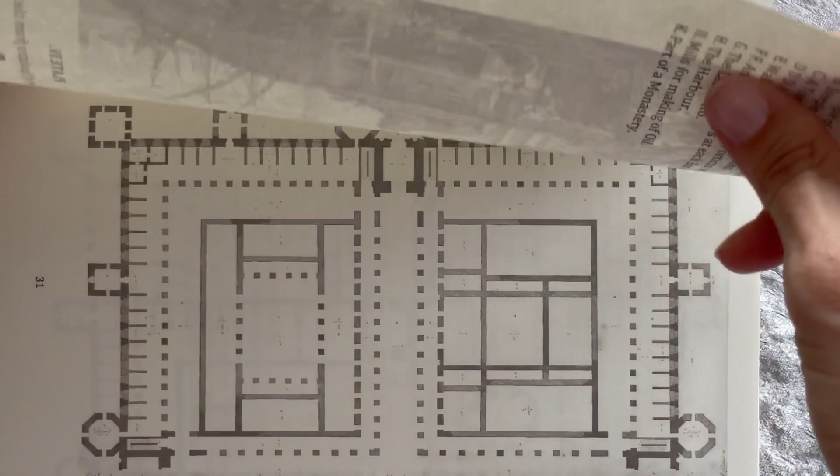This led me to form the scheme of visiting the ruins of Emperor Diocletian's palace at Spalatro in Dalmatia, that favorite building in which, after resigning the empire, he chose to reside. I knew from the accounts of former travelers that the remains of this palace, though tolerably entire, had never been observed with any accuracy or drawn with any taste.

The palace of Diocletian at Spalatro possessed all those advantages of situation to which the ancients were most attentive, and which they reckoned essential to every agreeable villa. The soil of that part of Illyricum was dry and fertile, though now considerable tracts of land lie uncultivated. The air is pure and wholesome, and though extremely hot during the summer months, this country seldom feels sultry.

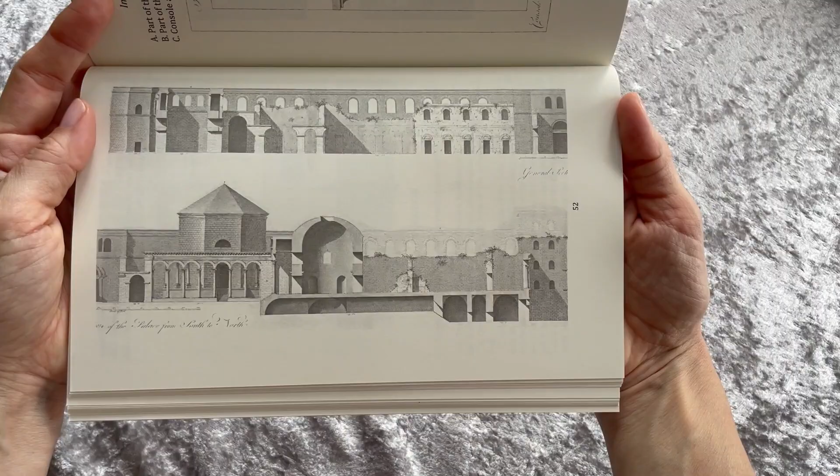The views from the palace are no less beautiful than the soil and the climate were inviting. Towards the west lies the fertile shore that stretches along the Adriatic, in which a number of small islands are scattered in such a manner as to give this part of the sea the appearance of a great lake.

On the northwest lies the bay which led towards the ancient city of Salona, and the country beyond it, appearing in sight, forms a proper contrast to that more extensive prospect of water which the Adriatic presents both to the south and to the east. Towards the north, the view is terminated by high and irregular mountains, situated at a proper distance, and in many places covered with villages, woods, and vineyards.

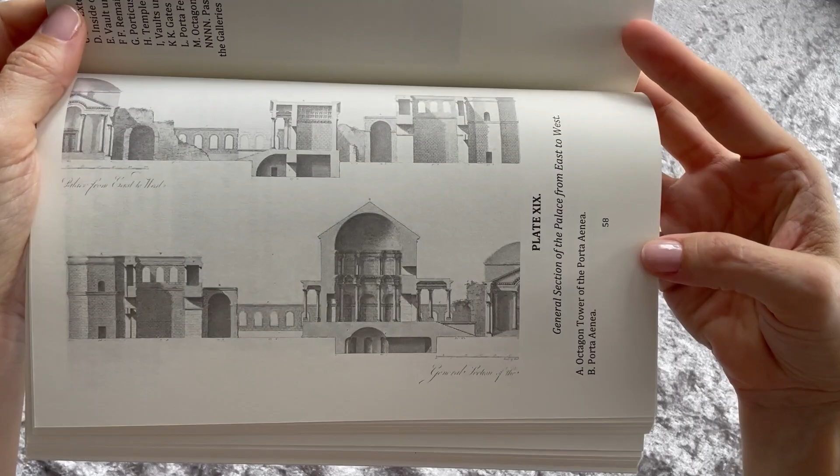From this description, as well as from the views which I have published, it is evident that no province in this wide extended empire could have afforded Diocletian a more elegant place of retirement, and the beauty of the situation, no less than the circumstance of its being in his native country, seems to have determined him to fix his residence there.

The present state of this great structure may be more perfectly conceived by considering the plan of it than by any description whatsoever. The curiosity of the reader, however, will not be satisfied with viewing this building in its present ruinous condition, but must naturally desire to form some idea of what was its plan and disposition in its more perfect state.

By good fortune, its remains are in many places so entire as to be able to fix with the utmost certainty the form and dimensions of the principal apartments. The knowledge of these leads to the discovery of the corresponding parts, and the description given us by Pliny and Vitruvius of the Roman villas enable us to assign to each apartment its proper name and to discover its use.

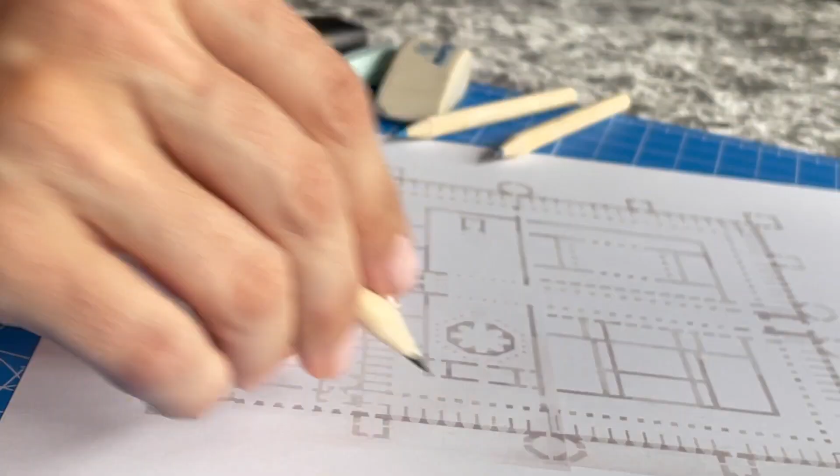Adjoining this is the Corinthian Hall, which the architect has designed observing a rule of Vitruvius by making the length of the room twice its breadth. Corresponding to the Corinthian Hall and opposite to it is the Egyptian Hall, which in every particular resembles the former.

These halls, together with the tetrastylis, or rooms of four columns, Vitruvius calls by the common name of the oeci. They were apartments for eating, and were generally of such a size as to hold two triclinia, or tables, with three beds each.

Next to these we find different apartments destined for bathing, a practice which the ancients considered essential to health, and with regard to all the apparatus necessary for that purpose, they displayed not only great elegance, but the utmost luxury.

Here we first enter the apodyterium, which was a room for undressing, and sometimes contained a tepida piscina, or lukewarm bath, so large as to allow of swimming about in it.

Next to this is the cella frigidaria, in which there was a baptisterium, or cold bath. Adjoining to this is the unctuarium, or repository for unguents, with which the ancients anointed themselves before their exercises.

From this we go to the cella tepidaria, or cella media, so named from its middle degree of heat, and because it was a necessary preparation for the laconicum, or cella caldaria, which was a bagnio for sweating in.

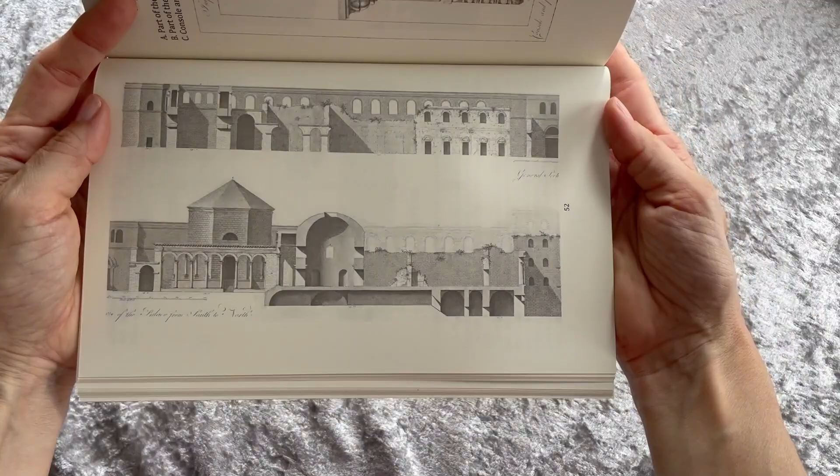Adjoining to it and towards the cryptoporticus was what I take to have been a private cenatio, or supping room. This enjoyed the benefit of the setting sun, which for winter eating rooms Vitruvius recommends as requisite.

Beyond the exterior procoeton, and adjoining the arcade, are a number of vaults, which were probably employed as cella servorum, or cells for slaves, though originally, and during the time that Diocletian held the empire, they might be used for lodging the Praetorian soldiers.

It is observable that during all my researches among the ruins of this fabric, I could not perceive the smallest vestige of a fireplace, though this was a circumstance to which I attended with particular care.

Fireplaces, however, the ancients undoubtedly had, as Vitruvius mentions them, and directs the cornices of those rooms in which they were used to be puri, or unenriched, that the dirtiness contracted by the smoke might be the more easily wiped away.

The baths, the dormitorium, the sphaeristerium, and other apartments which I have just now described, lie all in the west end of the palace.

The Pinacotheca, or room for pictures, and the Bibliotheca, or library, are apartments which Vitruvius mentions as common in all great houses of the Romans. It would therefore surprise the reader should he find no such rooms in the palace of an emperor who was so remarkable for his love of the fine arts.

But if we consider that noble porticus or gallery which stretches along three sides of this building above the cella servorum and arcades, extending no less than 1212 feet in length and 31 feet in breadth, it is evident that sufficient space was left for apartments consecrated to those elegant arts of which Diocletian was so great an admirer.

Towards the east, as we learn from Vitruvius, was the proper situation for the Bibliotheca. Towards the north was the exposure most approved for pictures, and the west side may have been reserved for a horeum, a room which Pliny mentioned as a repository for statues, bas-relief, and other curious productions of art. This gallery was divided by the three gates to the palace, and by the towers on each side of them. But I found the communication had been preserved by passages formed in the thickness of the walls over the gates, as may be seen by the general sections.

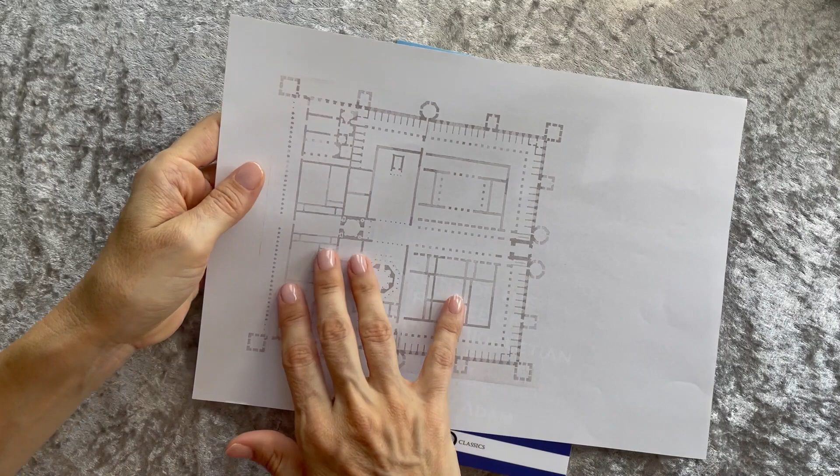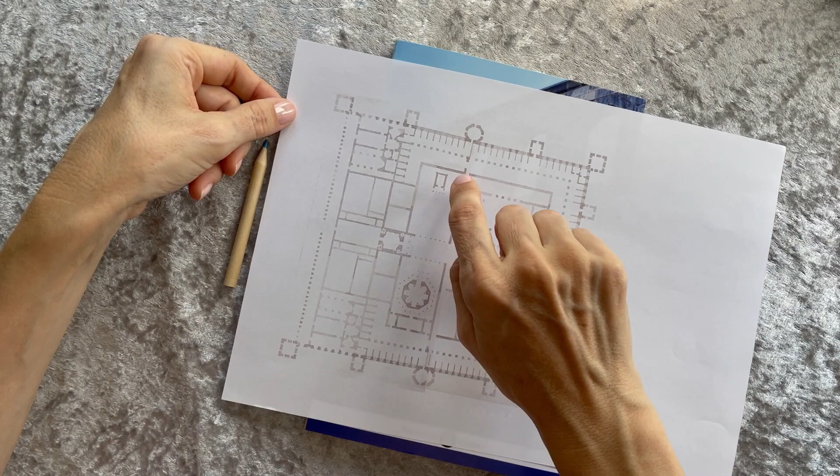Let's see what you've done with pencil and paper. Very, very nice. I think you've got everything there. We have the guard towers, the gates, the portico, walkways, and the temple of Jupiter. The guardhouses, the atrium, and all of the chambers, and the other temple there. Very beautifully done. I'm going to save that in our scrapbook.

Thank you for spending this time with me here in the study. It's always such a pleasure. And it has been very relaxing. A very happy time. Take that relaxation and happiness. Keep it inside yourself. Be good to yourself. Be kind to others.